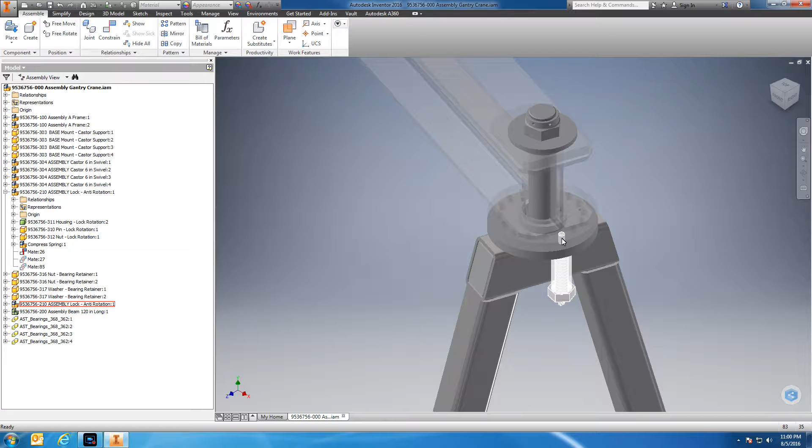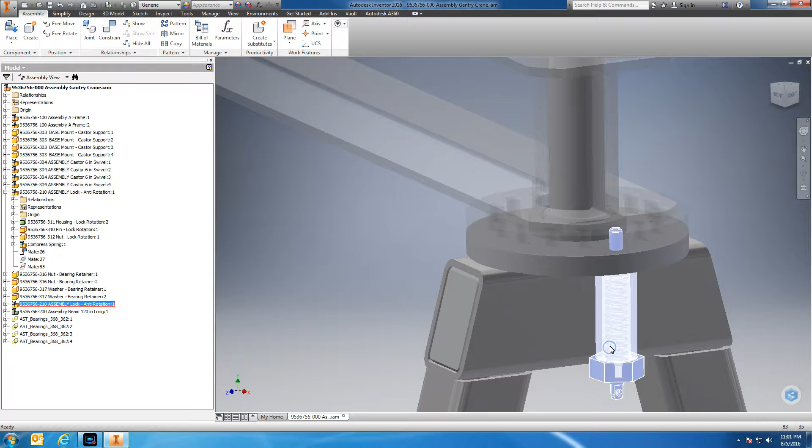The pin, as you can see here, is protruding through this plate that's welded on the top of the A-frame, and you can see it penetrates all the way through this circular plate that's welded to the bottom of the beam. So for right now, what we're going to do is we're going to open this lock assembly, and as I said, I have phantomed out this housing just so you could see the spring.

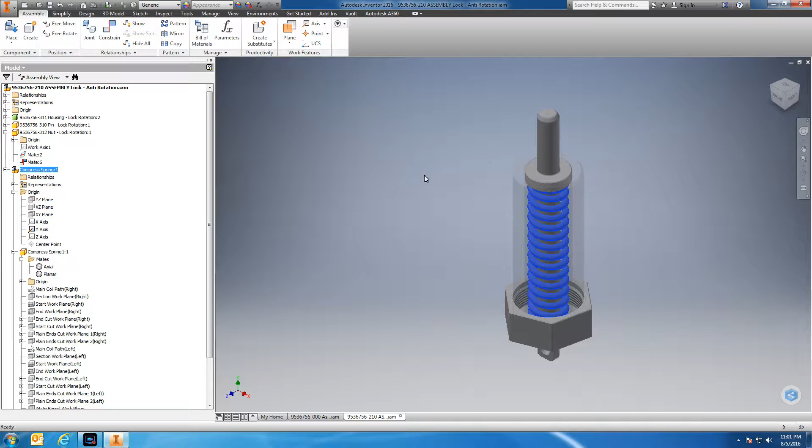The spring here is a commercially available spring. I picked it up at one of my local industrial suppliers. We'll talk about it a bit later. The pin assembly we've already machined. It was done on the manual lathe. It's been machined from O1 tool steel. We started with a 1-inch diameter drill rod, and we machined it down to this size.

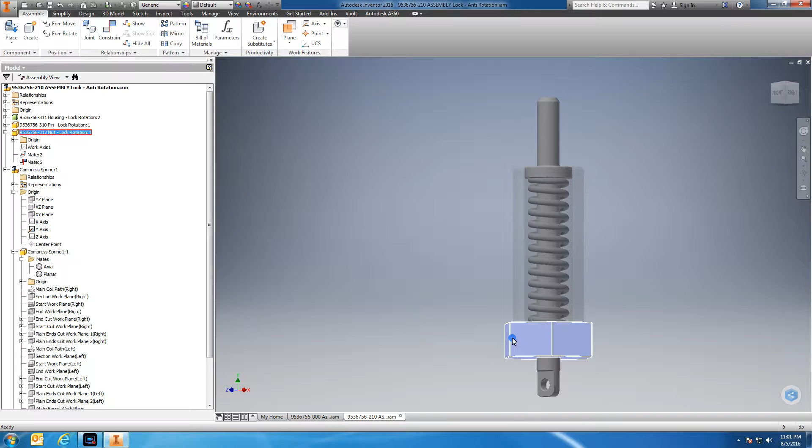In the next video we're going to talk about how we're going to machine this end. But specifically for today, we want to talk about the nut and putting the thread in the nut. As you can see, we have made this nut from, I think it's 1018 steel. We're measuring from this face across the nut to the other side, and you'll notice over here that it's 1.7 inches in diameter.

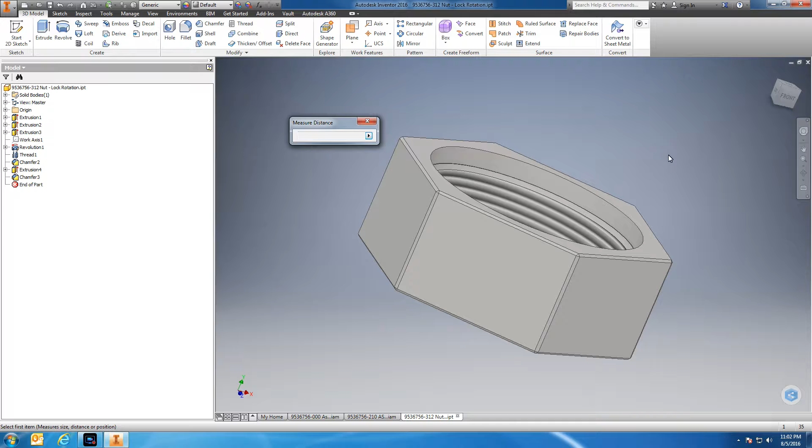We're also going to measure the distance across there, 1.510. That's exactly 10 thousandths over the 1.5 inch, and we did that to make sure that we'd have clearance when the nut was threaded on the housing, and that this part of the nut right here would not interfere with the housing, and that the nut would fully seat and bottom out on this surface down here.

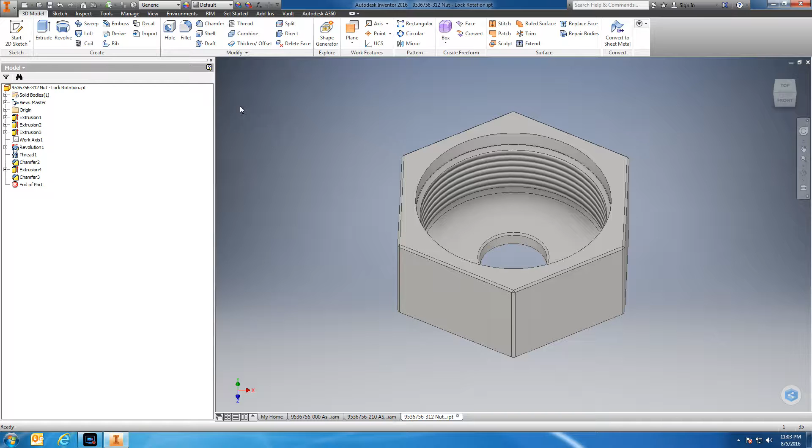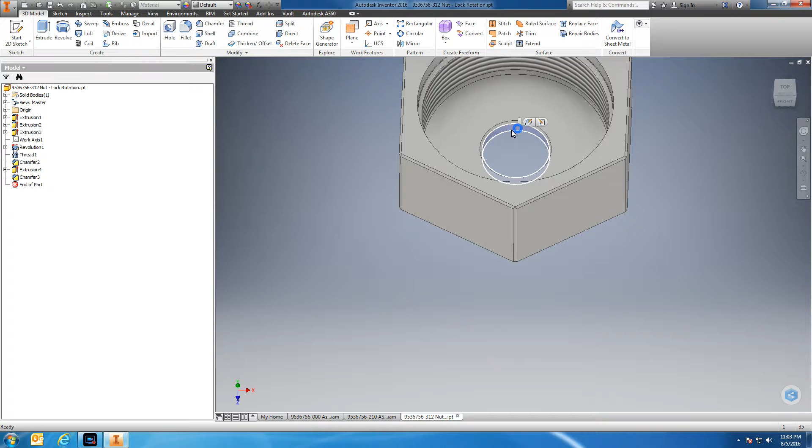So we've generated this nut in here. Let me back up and say that we cut with the saw a length of this nut. We put it in the manual lathe, faced the two surfaces, this surface and this surface, until the thickness from this surface to this surface was 3/4 of an inch. And on the manual lathe we also drilled this hole right the way through the stock.

So we're going to now get set to pocket out the opening and machine the thread on the manual mill. Or I'm sorry, on the VF2 Haas CNC mill. In order to do that, we need to generate a G-code that's going to be readable by the CNC. So it's a two-step process.

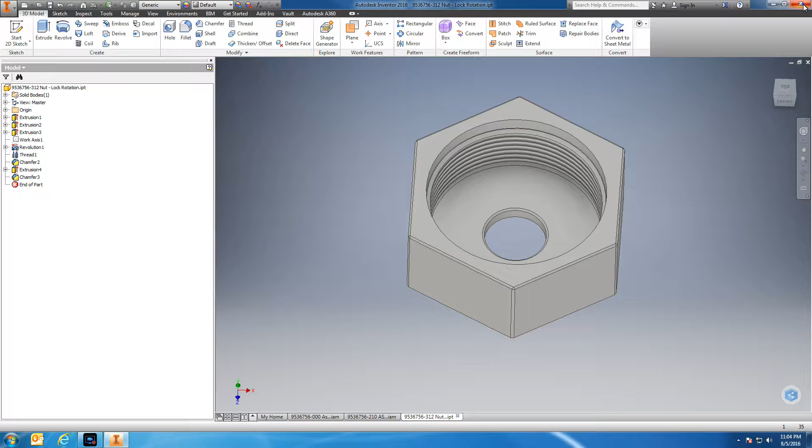The first step is we come here and we generate an IGES file, and we're going to save it as an IGES file. I'd already done it, so we're going to just replace it and overwrite it. This concludes what we need to do in the Autodesk software for this nut. So I am going to save this and completely close down Autodesk. And when it closes, we're going to bring up BobCAD version 25.

So here we are. We're going to open this one. Get that off the screen. And we're going to go up to the file, and what we want to do is we want to open an IGES file. So we say that, and we come down here, and there's the file we're looking for, and we say OK.

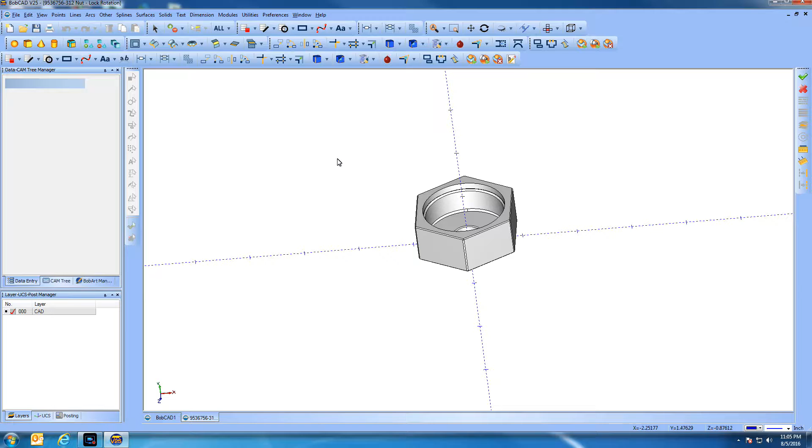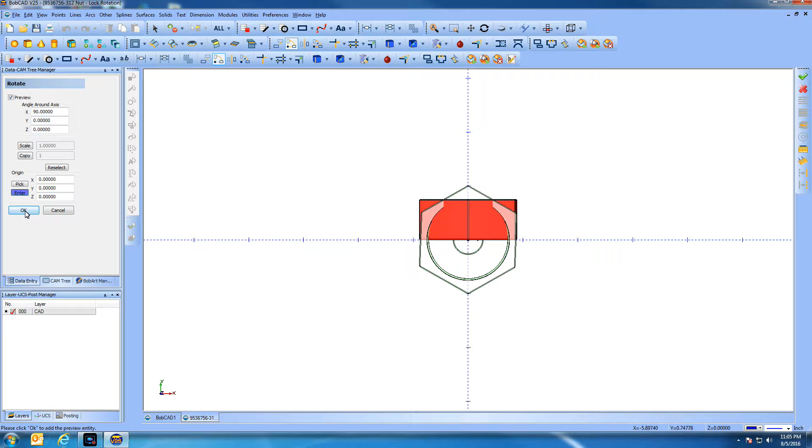Now the solid model has been placed correctly in the BobCAD software, except that we want to have it viewed in the plan view, and what's shown is the elevation view. So what we need to do is Utilities, Rotate, and we might as well rotate around the x-axis 90 degrees. We say OK, we select the part, we say OK, we confirm it, and we cancel. Now we're looking at the part down from the top.

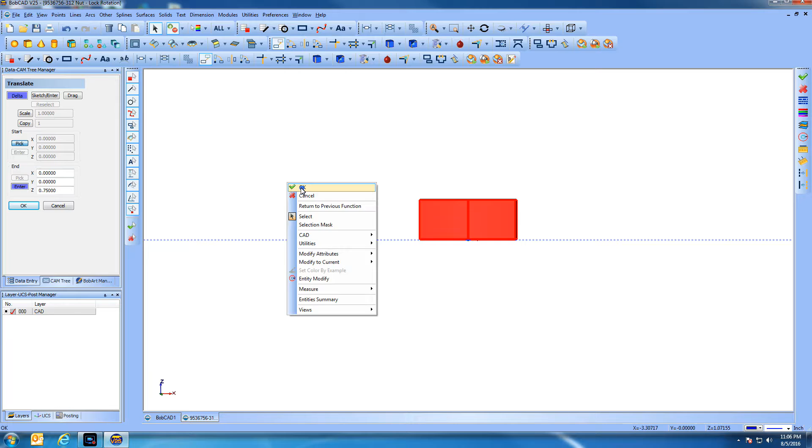The pocket that we're going to have to cut is visible to us. It's pointed right at our cutter in the z-axis. And so what we need to do now is set the top surface as the Z. So we take Control 2, and this gives us the elevation view. So we go to Utilities, Translate, and we need to move this down 0.75 because we know that that's how thick this nut is. We say OK, we say OK, and we confirm it here.

Wrong, minus 0.75. We say OK, and we do that again, and we say cancel. We then go back to the plan view, and if this was a more complicated 3D part, we'd machine it in 3D. We generate the code to do it in 3D. But this is a relatively simple operation, and for the purpose of what we need to do, we're going to do this as simply as we can.

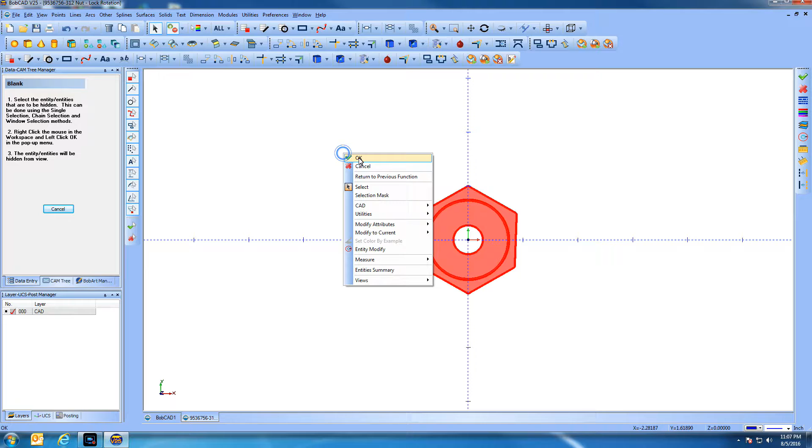So what we need to do is go to Utilities. We want to extract the edges from the solid, this solid, and we say OK. Then we go and cancel this. We view, and we want to blank the solid, and we say OK. And what we have is a wireframe view of the part.

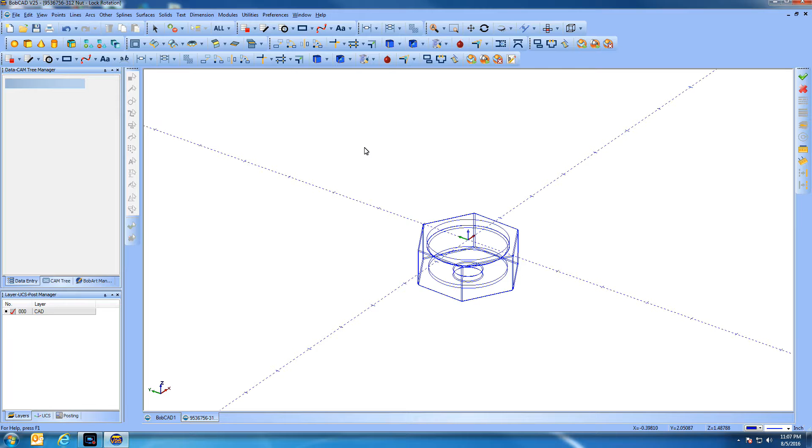Now, we don't need all of these surfaces for the sake of pocketing this out, cutting the thread, and opening up this little recess. So I'm going to turn it into elevation view. I'm going to select, go here, across here, and I'm going to delete everything that is there. Then I say cancel, and I go back to the elevation view.

I do the measure trick just to confirm what I have, and there is my, well, it's 0.755. Autodesk Inventor works in terms of diameters for circles, and BobCAD is in terms of radius. So this 0.755 is actually the radius of a 1.51 diameter circle. So we say OK, we're done there.

Now what I also should have done was just to confirm that this entity was in fact on 0, and it is. So its center is at x0, y0, and z0, and the radius. Okay, so we can close this. We need a point to generate the thread mill thread.

So we're going to select arc center, and we're going to pick this arc, and although you can't see it, there is a point that's been generated right here. So we cancel some of these to close them down. Now what we do need is another arc that we've taken away because it wasn't at the correct Z coordinates.

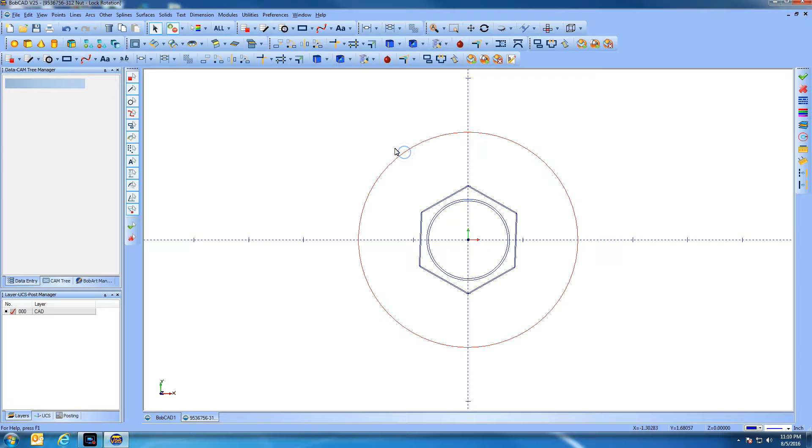So we can confirm that if we measure the entity, this entity here, 0.722, that's correct. So cancel. Come up here to the CAM tree. We're going to do milling. We've got carbon steel. This is the post processor for the VF2 mill, the one that works on our system.

Milling stock, we need to set up the stock wizard. And what we're going to do is make the height 0.75, and we say OK. And when we rotate this, you'll see that. And if we bring up the nut, we do view, unblank the nut, you'll see the nut is there. Okay.

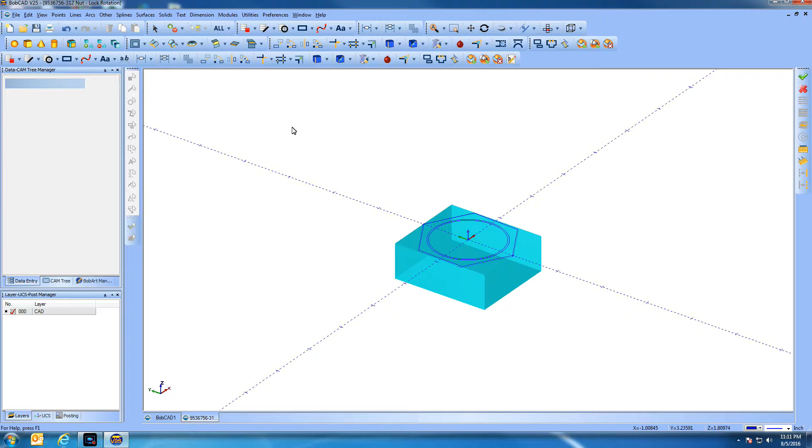So we're going to go back to the view here and we'll open the CAM tree, and we're going to blank this stock just so it cleans up what we're doing. We don't have to deal with it. So we're going to want to do a 2-axis. Oh, before we do that, I want to do something for clarity.

I want to draw another arc, coordinates on 0, but I want it to be a radius of 0.25. And that's there just to remind us that this hole, a 1/2-inch hole, has already been drilled through the stock. We drilled it on the manual lathe when we were facing it.

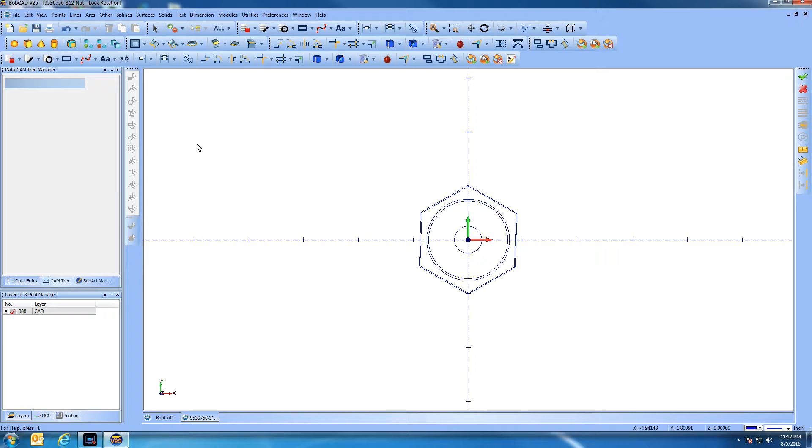Okay, we're going to cancel this, and now we're going to do machine setup. We're going to 2-axis mill, and we're going to do some pocketing. I'm going to select the geometry, and we're selecting the ID of the thread. We say OK. We go next. We have a rapid plane 0.1 over the part, 0.1 for the feed plane, and the top of the part is at 0, and we say next.

Work offset is G54, and we're not putting this out to a 4th axis, so this is unchecked. We're going to want to use a carbide cutter, so we're going to go to the tool library and pick one. This one here will do fine. We say OK. We want to get rid of the automatic numbering. I know this is going to be in tool position 3. We select this one and we say OK.

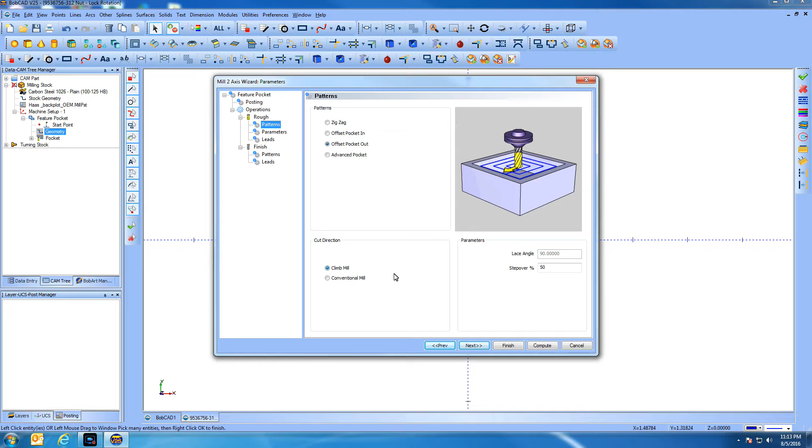I don't like the tool setting here. It's not set correctly. So I do this at 490. 1.5, 1.5 thousandths. And the plunge is reasonable but not important because we're plunging down into a hole that's already been drilled. We go next. We want to pocket out. I'm going to use climb milling, and I like about 50%.

I'm going to leave a side allowance of 10 thousandths of an inch. We're going to go multiple steps, and each step going down is going to be 50 thousandths of an inch. We're going to use even depths. I say next. If we do this, you'll see that this is 625, and this is supposed to be 50 thousandths of an inch. So you'll see that there's going to be 13 passes.

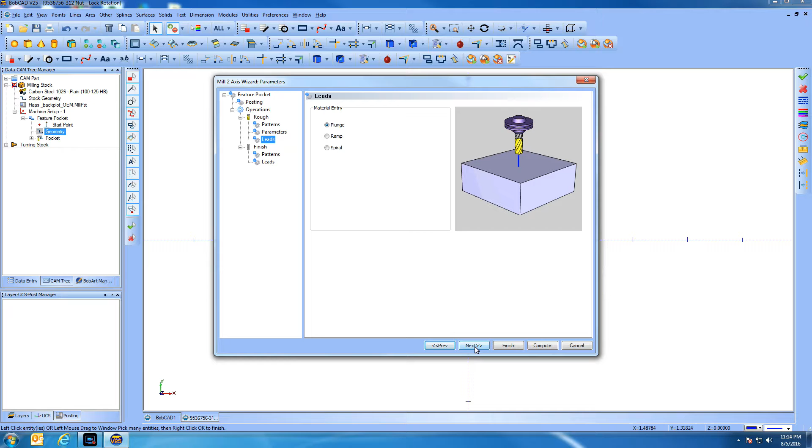We go next. I want it to plunge down again because there's a 1/2-inch hole in there. There's no stress on the 1/2-inch end mill. We're going to the finishing cutter. We're going to say 0, and when we put a 0 diameter in here, the software ignores this tool. We say compute. 1, 2, 3 passes as it goes around.

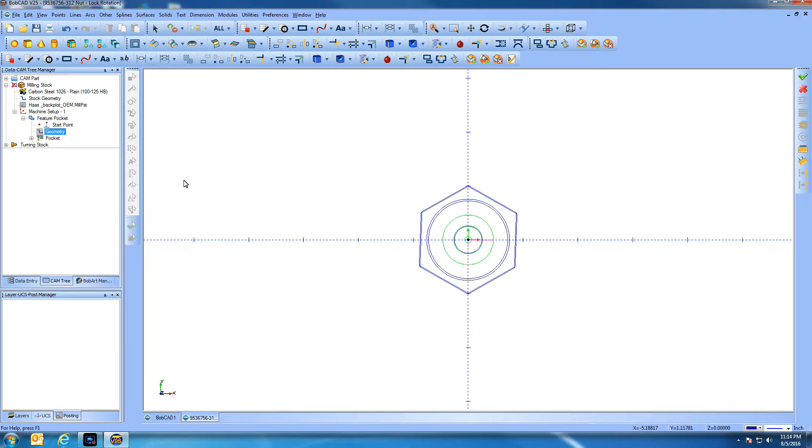Okay, so I'm going to blank this toolpath, and you recall I left 10 thousandths, so now what I want to do is I want to do a 2-axis. I want to do a profile. I'm selecting the geometry. It's the same ID that we had before. Nothing's changed here. Still nothing's changed here. It's the same tool. We got to make sure this is at 490, and I'm going to set this at 1.5 again, 1.5 thousandths.

Say next. Standard contour, 0 allowance. We're going to go down the whole 625 in one step, and we're going to side mill this. So we say next, and we're going to use a circular pattern, 0.25 of an inch, and we're going to compute it. And what will happen here is that the tool will come in here, come around here, and go around. And if we do this, you'll see that one pass.

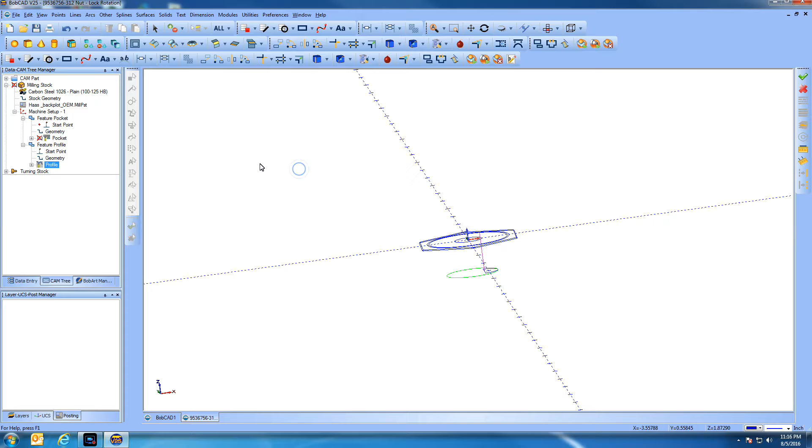The red line is the travel down. It comes around, goes around here, comes around, comes back, and goes out. Okay, so we've got that. Cancel that, like that. And again, I'm going to blank this just for clarity. And now we want to actually do 2-axis milling. We want to thread mill this. We say next.

We select the geometry. Remember that point I put at the center? We select it. We say OK. Go next. That's all good. That's all good. This is not the right mill. This is the default mill. We're going to go to the tool library and we're going to pick one that is close. So about 5/8 by 18. Let's say we use that one. I know that this is in tool position 4. So we go there. We say OK. I'm going to leave this because this works well.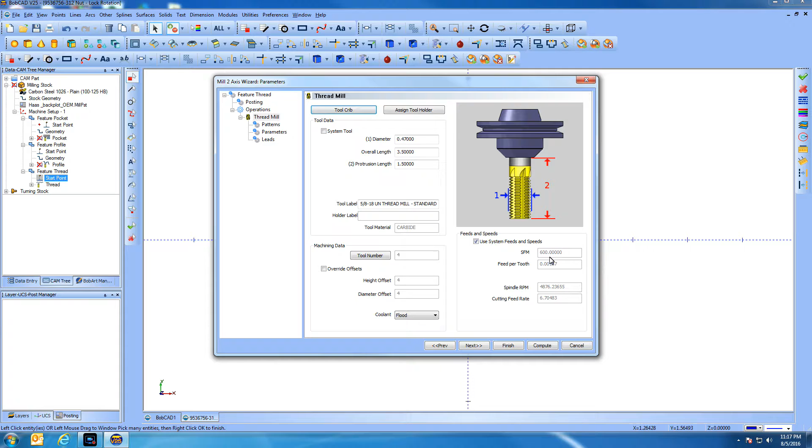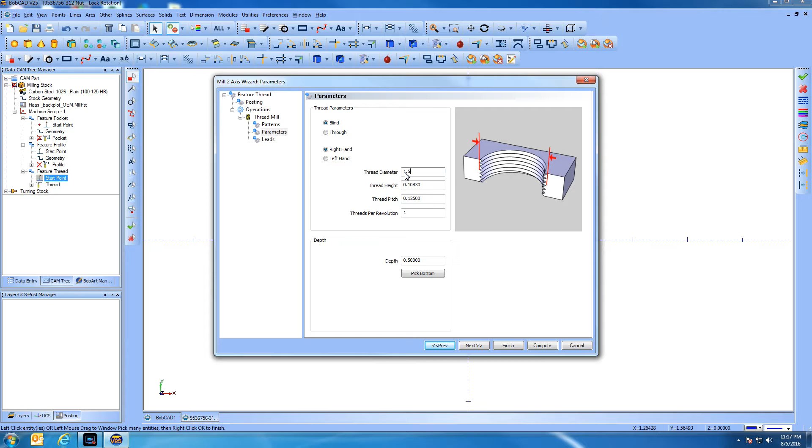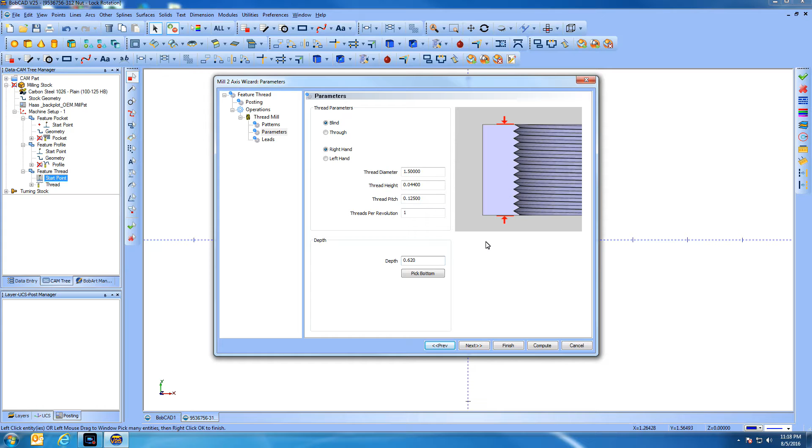We're going to go down to the bottom and come up, and it's inside hole. So you can see this is the image, it's shown as an inside hole. We say next. The thread is 1.5, that's the major diameter. The thread height is 0.044. The thread pitch is 16 threads per inch, so 0.125. And the depth of the thread is going to be 620. Give us 5 thousandths for clearance on the bottom. We say next.

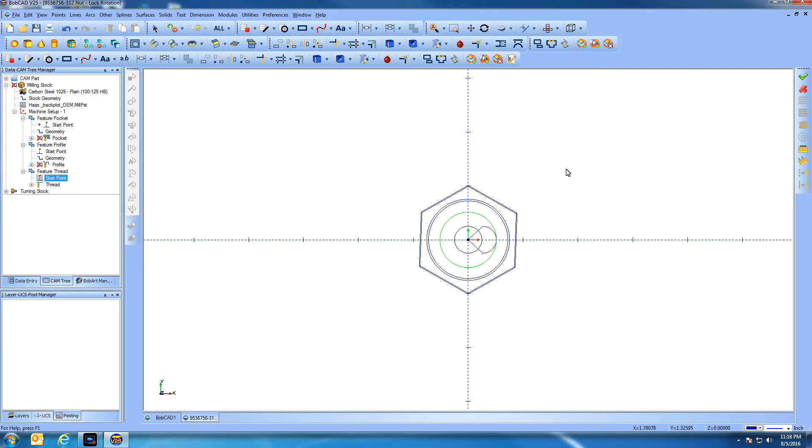We're going to do a circular pattern, but I already know that 1/2 inch is too much, so we're going to set this at 2.5. The same here. We say compute, and you'll notice that we have the part coming in, and what I'm going to do is I'm going to show this in isometric view, and you'll see that the part is being cut. It goes down to the bottom around here and comes back up and comes out to this point here, and then retracts the tool.

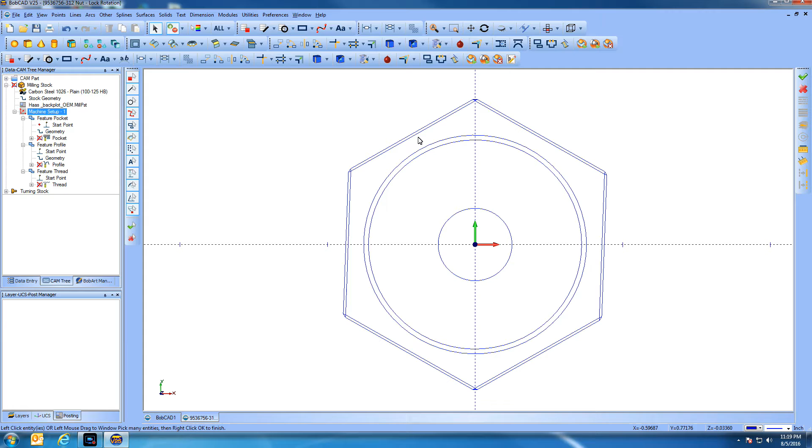Okay, so that's that one done. So again, we say cancel. We go back to the plan view. I'm going to blank this toolpath, and we're going to do the last process. We're going to do 2-axis milling. We're going to do profiling. Select geometry. We're now going to use this outside geometry, outside diameter, the 1.51 diameter. We say OK.

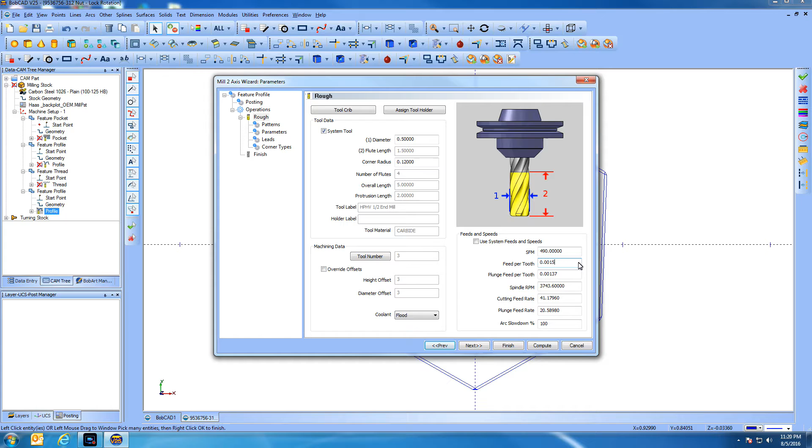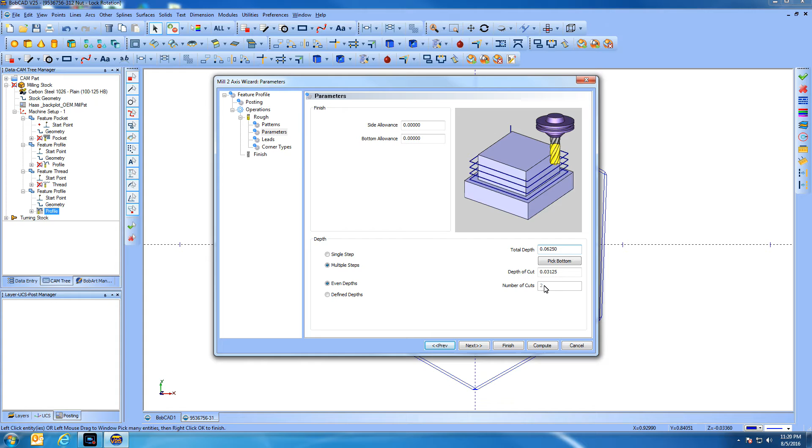All of this is good, nothing has changed. Same tool, again, 490, 1.5 thousandths of an inch, standard, single, we're going to do multiple steps. We wanted to go down 0.0625, and I'm going to put in 35 thousandths of an inch, which I know is too much, but it makes it 31.25. There's two cuts, and we say next.

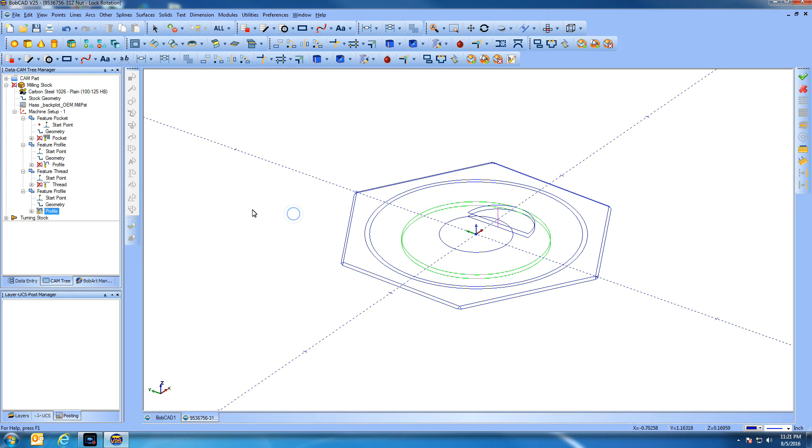We want to do this in a circular pattern. I know that 0.25 is good for that. We say next, next, and we compute it. And you'll notice that again, the tool comes around here, goes around, and it does two passes. And again, if we look at this in isometric view, you'll see the two passes. This red is the rapid plane, and the feed down to the correct z-axis. And there we are, cancel. And we're going to go back to the elevation.

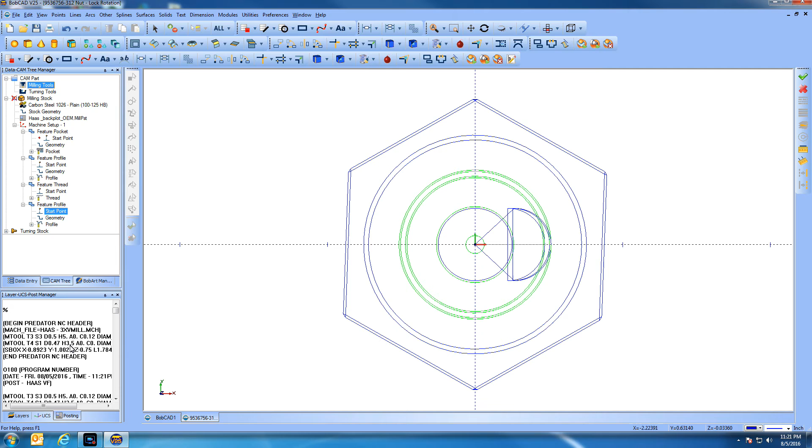And so now we have all of these tool paths. And what we'll do is we'll go to the CAM, we'll say milling, I'll compute all those again, and I'll say post. And based on this post processor, BobCAD has generated a G-code file that can be used to cut the part. At this point, we'll transmit this straight text file to the CNC mill via an antiquated RS-232 port at 19.2 baud.

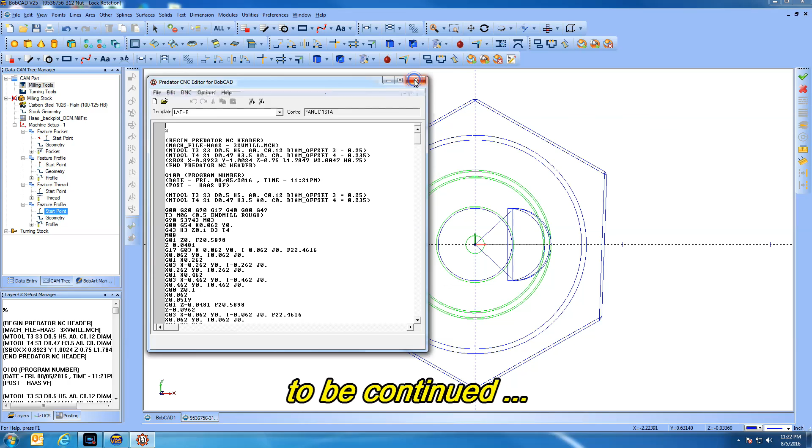I guess it's okay because the VF2 mill is pretty much an antique as well, but works good, gives me accurate finished parts, so I'm happy. So the next time you see us, we'll be coming up with the mill. I'm going to stop this now and we'll go from there.